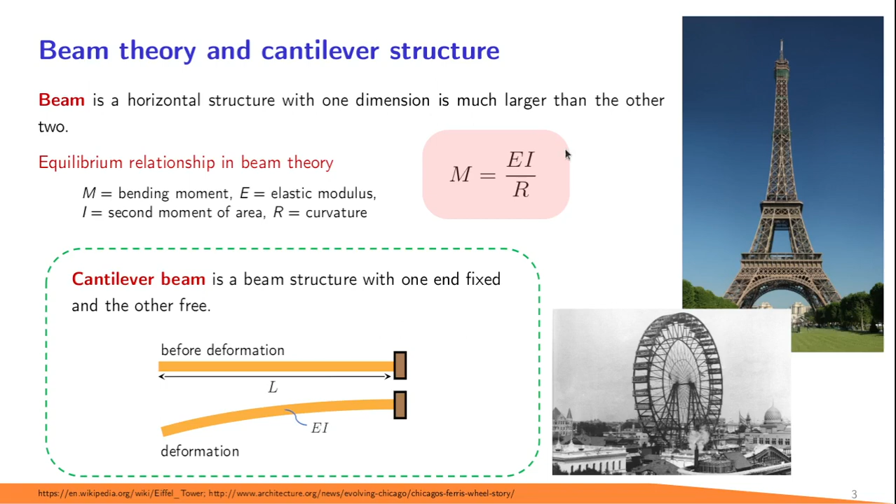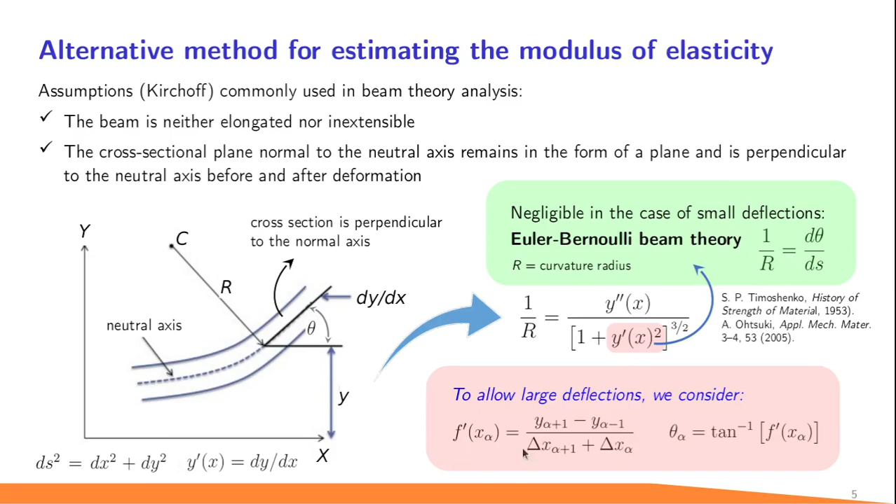And for our purpose, we discretized this relationship. We firstly transformed the bending equilibrium equation in discrete form, and since we would face arbitrary bending angles, either small or large, the Euler-Bernoulli equation shouldn't be applied since this equation has been derived under the assumption of small bending angles. And to allow large deflections, we consider Taylor expansion. Therefore, the elastic modulus of the j-th segment of the discretized bending beam can be measured with the following equation, and we examine several samples to determine the elastic modulus.

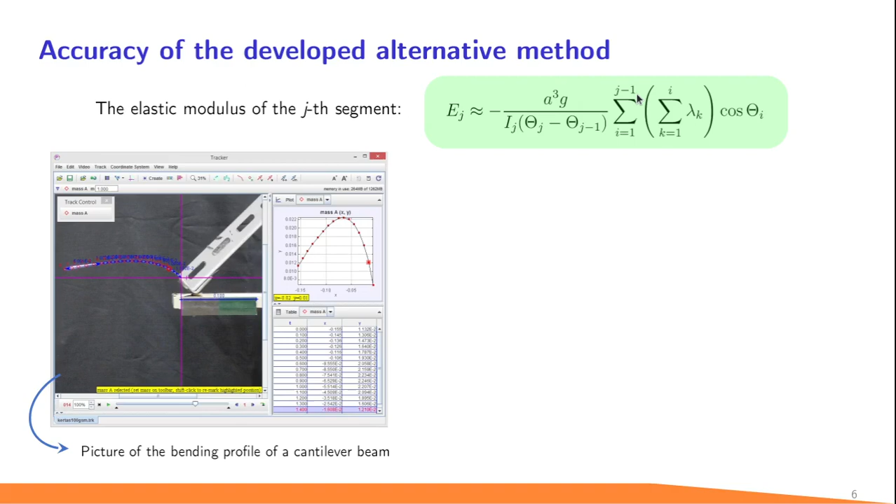And to further confirm the estimation results, we directly measured the elastic modulus of the samples with tensile tests, and our estimation deviates by about 12% from the measurement. This difference is likely acceptable since the measurement of the elastic modulus is generally not precise. For example, Zysset obtained variation by 49% in measuring the elastic modulus of human trabecular femoral bone using the nano indentation method. Lotz obtained variation by 61% for measurement of elastic modulus using the compression method.

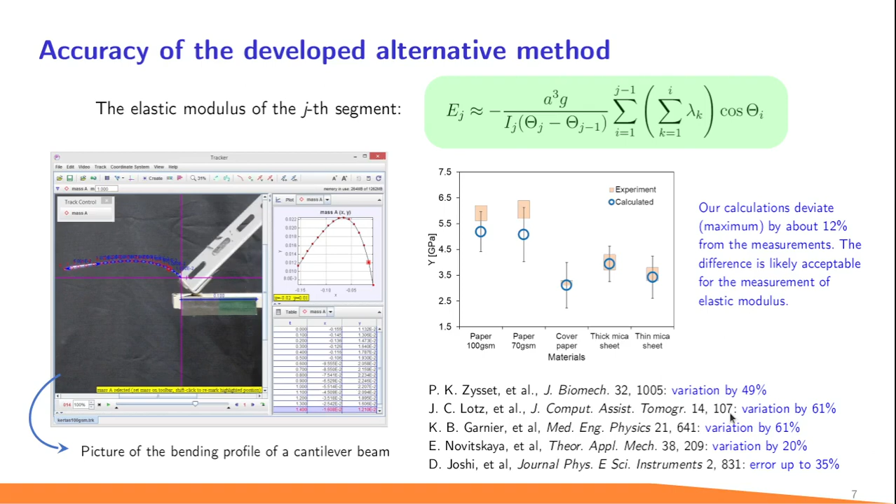Garnier obtained variation by 61%, and by vibrating a cantilever using an electromagnetic method, Joshi et al. reported a measurement of wire or strip can produce an error up to 35%. Therefore, the relatively small deviations in our measurements compared to the reference data are acceptable. And we also estimate the effect of temperature on the elastic modulus. And since the bending profile of the sample was recorded continuously during temperature rise, the proposed method allows continuous monitoring of the material modulus with temperature.

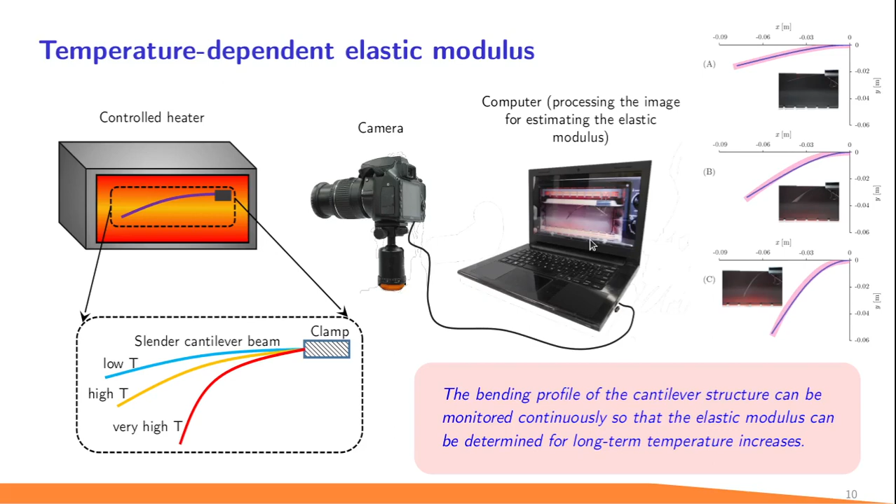And we find here that the reduction in elastic modulus when the temperature changes from the glassy plateau to the rubbery plateau is around 2.5 orders of magnitude. This is very close to the most accepted value of around 3 orders of magnitude, to mention that the dropping region is the glass transition region. And a phase transition from glassy to rubbery state induces a very sharp anomaly of the elastic modulus of materials. It is then interesting to inspect the equation that will describe the transition.

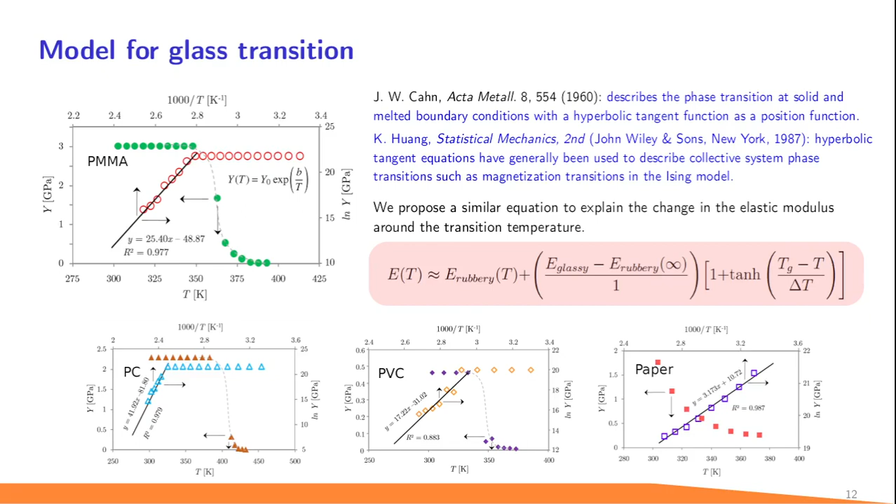Since we have considered the change of elastic modulus on temperature as a phase transition at the boundary in the temperature coordinate, we propose the similar hyperbolic tangent equation for describing the variation of elastic modulus around the transition temperature. And to justify our estimation results, we also directly measured the glass transition temperatures of the polymer samples and obtained a consistency between the calculated results and our experimental observation.

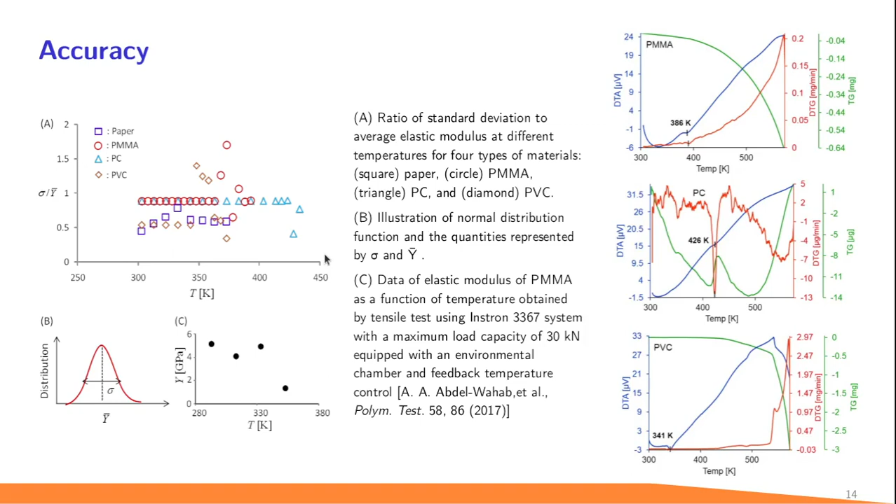And we also checked the accuracy of the estimation and we are very confident that the accuracy is acceptable. And so it is pertinent to mention that this is the first attempt for estimating the glass transition temperature of polymers based on the bending cantilever beam by the simplest method.